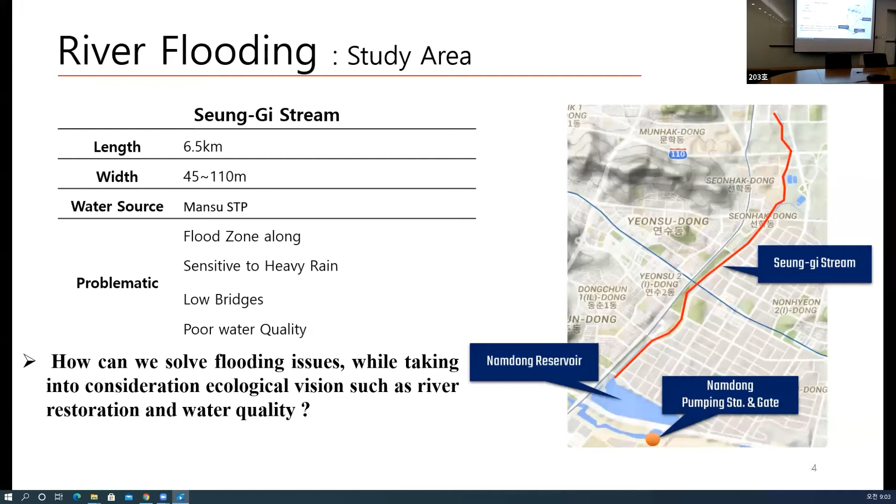HEC-RAS and QGIS were used to model the Seung-gi stream. HEC-RAS is a program that models the hydraulics of water flows from natural rivers and other channels. After simulating by setting conditions into HEC-RAS, we predicted the flow location and used QGIS to build a DEM and convert a cross-section to 2D to calculate a flow area in HEC-RAS.

When we built the HEC-RAS model, we set a new manning factor by reflecting the real condition in the basic model. After analyzing the results, we suggested improving the levee height with flood prevention measures. We referred to this table when we decided the manning coefficient.

We referred to the Seung-gi stream's field photos when setting the manning coefficient. The water from upstream to Bangjuk Bridge is clear. The waterway is straight and the riverbed has vegetation, so the manning factor is set to 0.045. The Bangjuk Bridge to YeonSu Bridge section has gravel and stone, so it is set to 0.05. Finally, from YeonSu Bridge to the downstream, we used a generic factor of 0.03.

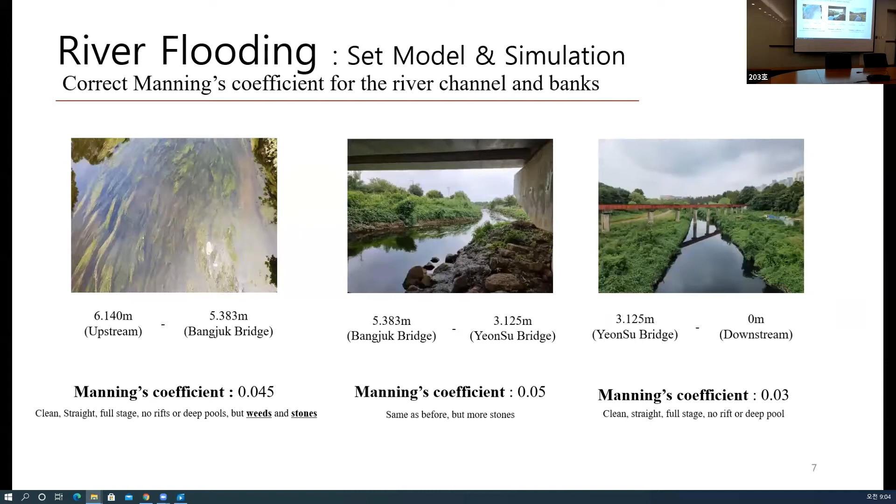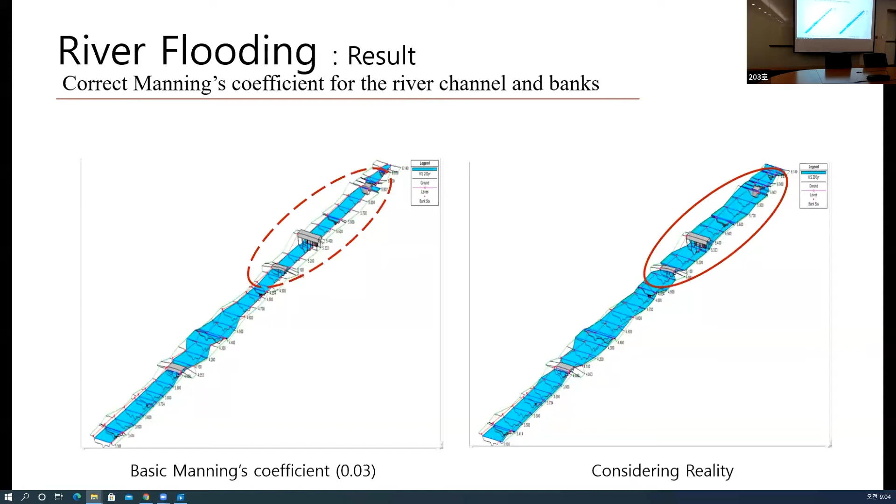As a result, we can see there was more flooding when we considered the manning factor according to reality instead of the manning factor according to the basic model. So this part of calibration is very important. You should always keep in mind that reality varies significantly from models.

This figure shows the frequency of 100 years from the longitudinal cut. The pink and purple lines represent levees, which can be seen to be flooded between 3.3 and 6.1 kilometers downstream after the 100-year return period.

In particular, the left levee is lower than the right levee, so flooding is more expected to occur on the left. On the map, the left side of the river is a company complex, which is expected to cause a lot of damage when flooding occurs. So this area needs flood prevention.

We improved the levee height of the flooding area. Today, the frequency of torrential rain is increasing, so the criteria of river design is increasing also. Therefore, the Seung-gi stream or local stream was originally designed for a 100-year plan, but the levee was raised with reference to the frequency of 200 years.

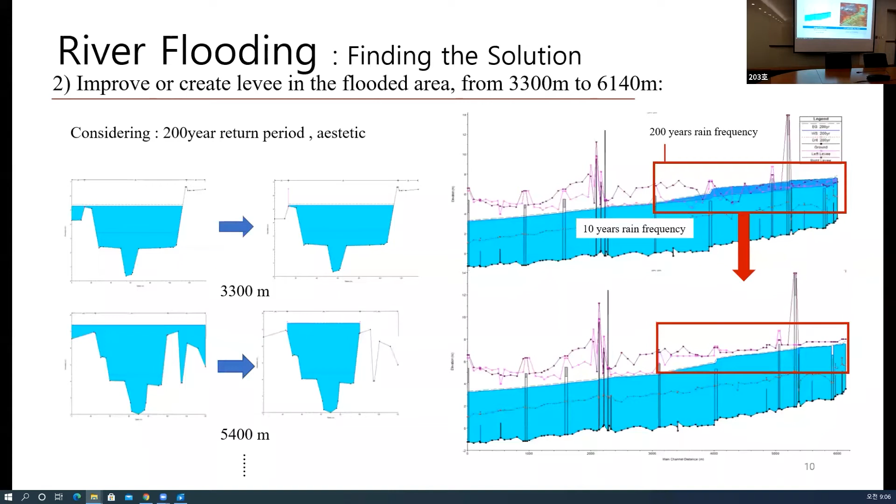With the longitudinal cut, it is easy to see the changes in water level and the height of the levee immediately, but it is difficult to know the extent of flooding. Therefore, we tried to express the flood with RAS Mapper after building the DEM.

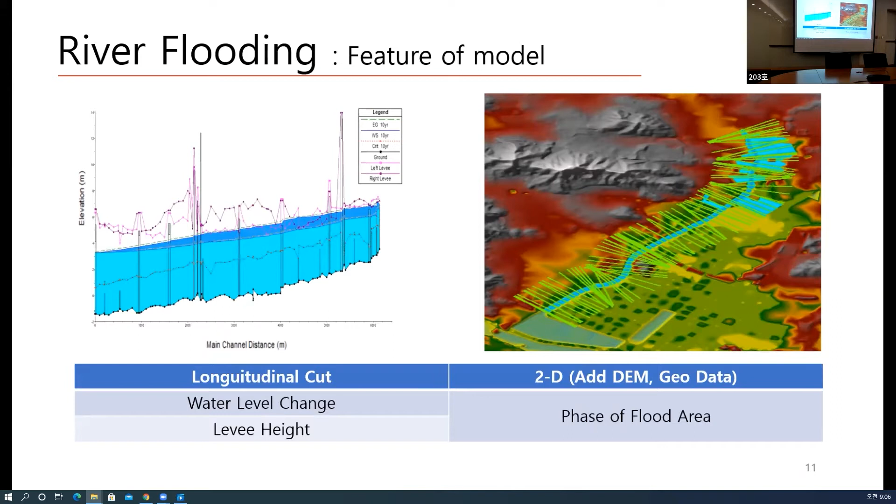This is the result we got. We can clearly see that the industrial complex area and the rural district will be safe according to the improvement of the levee that we made.

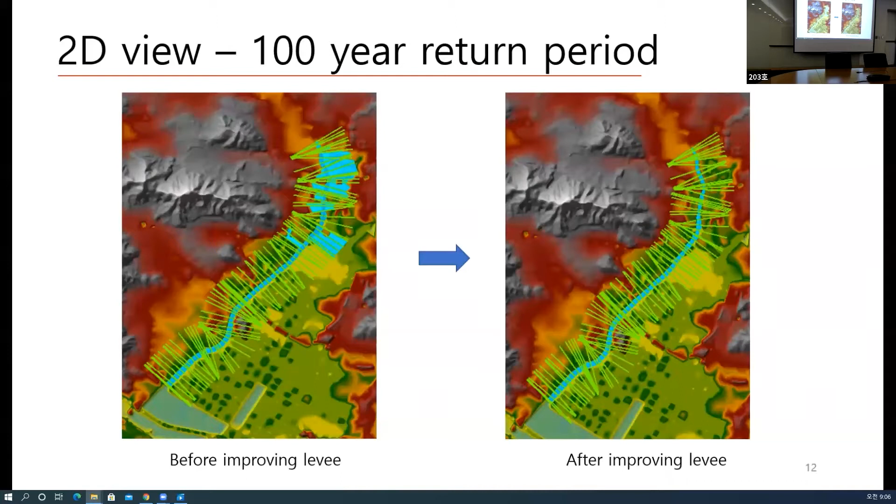According to the Seung-gi Stream report, we found a significant lack of dissolved oxygen. This report confirms the existence of stagnant zones in the middle stream, which leads to an increase of pollution as it runs downstream, and the predisposition of dissolved oxygen to fall.

So to improve water quality, we can apply a variety of methods, zeolite bed, artificial wetlands, or even purifying plants. However, these methods are determined by engineers in consideration of the situation and conditions in the applied area. In this study area, in the Seung-gi stream, we can expect positive effects by increasing the efficiency of self-purification, only if sufficient dissolved oxygen is maintained.

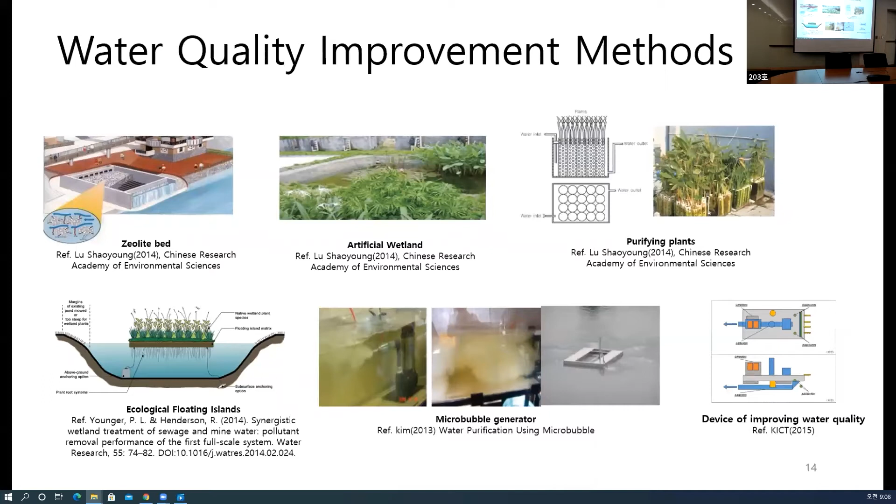Therefore, microbubble technology will be applied. I would have loved to show you a microbubble simulation and how this technology works, but sadly, with this recorded PowerPoint, that's not possible.

So I'll show the link. I recommend you take a screenshot, and you could search by yourself if you're curious. And if you don't have time, I will show the link again at the end of the presentation.

So then we were thinking about where to install the microbubble generator. We think about stagnant water, which will have the worst water quality in the riverbed.

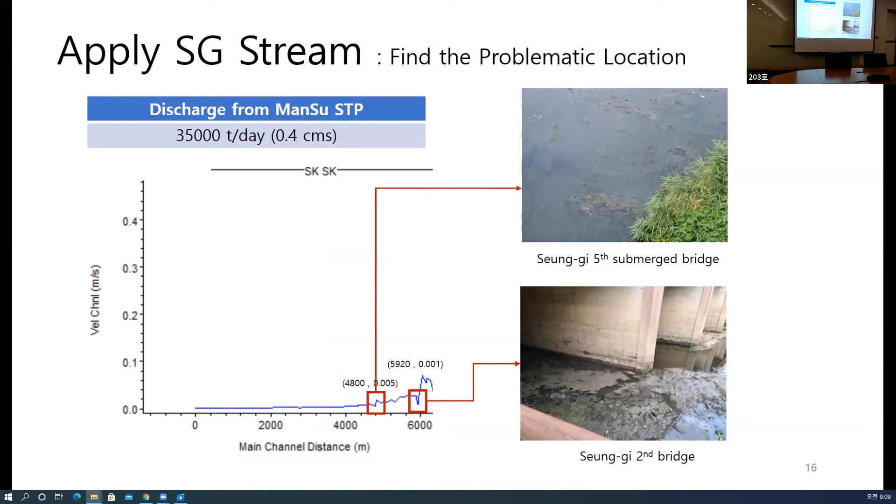Onga River in Japan is a good representative case of water quality improvement using a microbubble generator. Here is the location of Onga River, and a microbubble generator was installed in 2004. Figure 3 represents the dissolved oxygen distribution according to whether it's installed or not in the river.

Following the report, they now use the water as an intake facility. So if we can install a microbubble generator in Seung-gi, we could expect improving water quality like this. This is the end of the river flowing case, and now the next part will be the inland one.

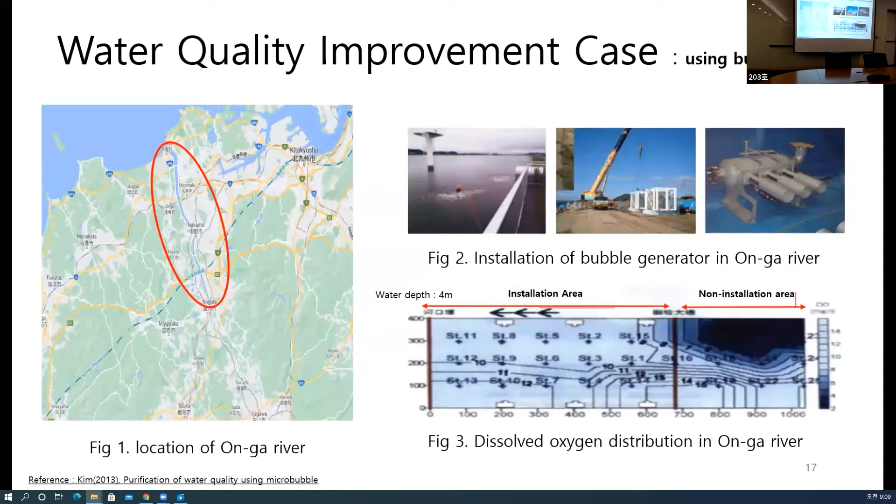On July 2017, a significant rainfall event occurred in Guwol-dong, Incheon. Rainfall gauges in the affected area recorded between 90 millimeters and 110 millimeters of rainfall over a 6-hour time period, and more than 100 area residents reported flooding.

With the EPA SWMM software, we were able to recreate this event. You can identify the flooded area with the red zone. Then, why did the flooding happen in that place in Guwol district? This is a question we asked ourselves.

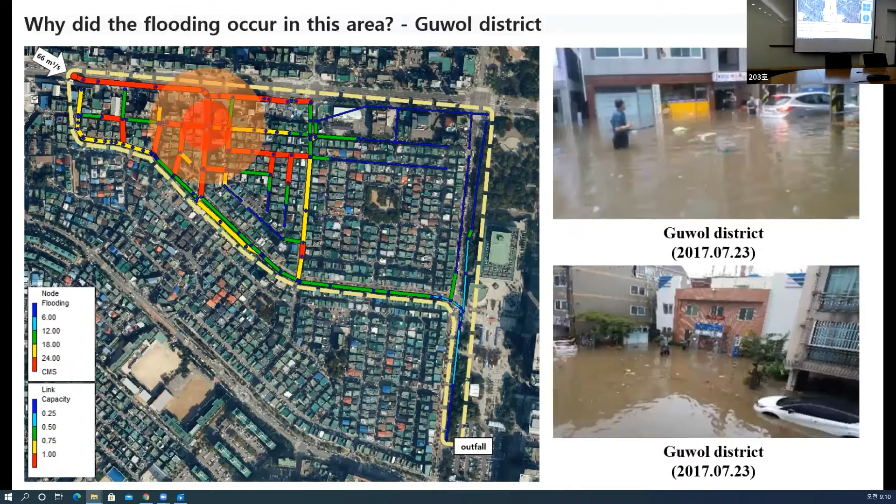We analyzed it for two main reasons. The first is that the cross-sectional area of the channel is small compared to the order of the main channel.

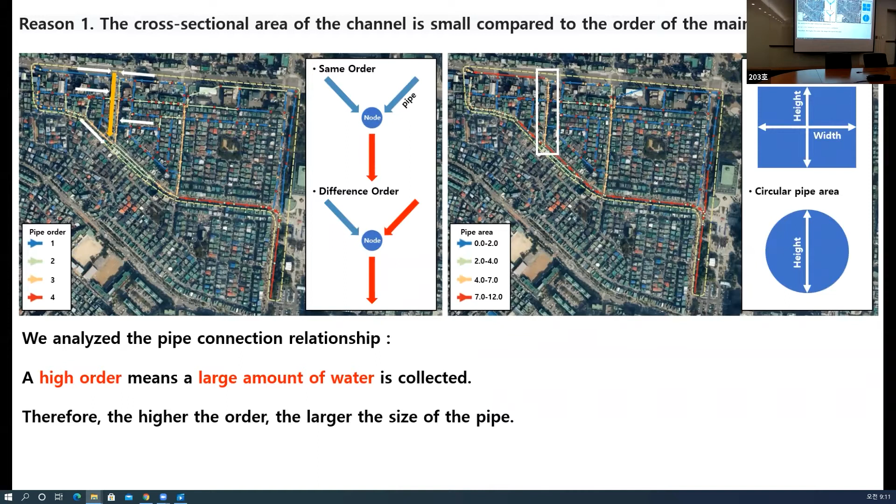In order to identify the cause of inundation in the target area, we analyzed the pipe connection relationship. A high order means a large amount of water is collected. Therefore, the higher the order is, the larger the size of the pipe has been. However, the pipes in the white box on the right figure are relatively small to handle the large amount of water transported upstream.

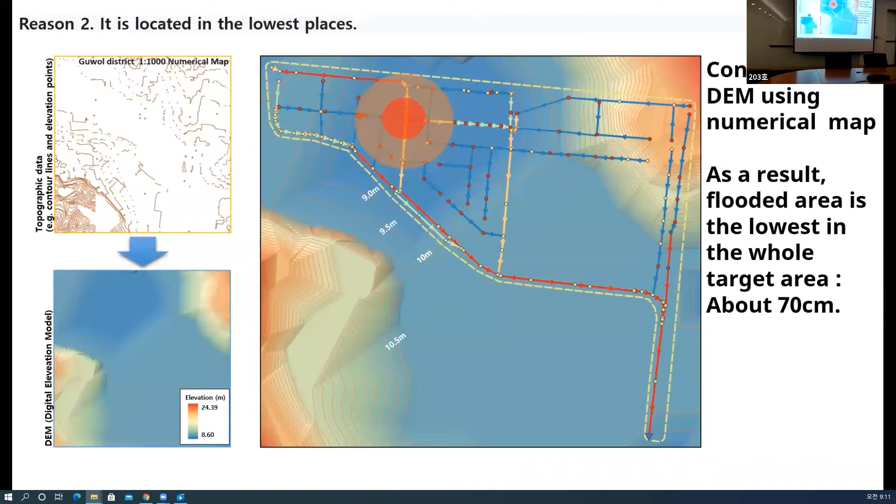Then how can we prevent the flooding in the Guwol district? More than 71% of the total area cannot be developed, which means difficulties in expanding new pipe networks.

So we found two sites where we can build storage tanks. Those sites are parks located in the city where it is easy to install an underground storage tank. So we applied a 65,000 ton storage tank.

It was confirmed that no flooding occurred in the main flooding node. Of course, this is the capacity considering only storage. When draining facilities such as pumps and flood networks are applied at the same time, the storage capacity will be significantly reduced. So it's not really 65,000 tons, it will be something lower.

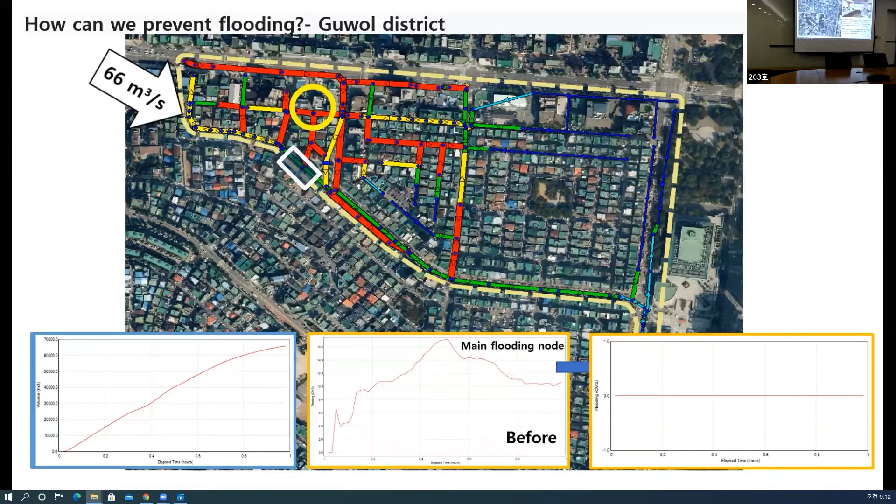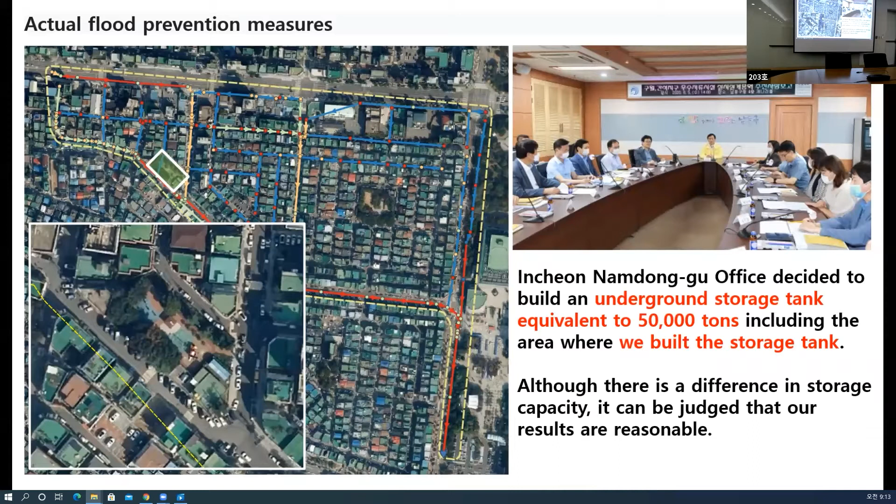There are practical policies that can add credibility to our results. In fact, Namdong-gu in Incheon decided to build an underground storage tank equivalent to 50,000 tons, including the area where we build the reservoir. There are differences in storage capacity, but our results can be judged to be reasonable.

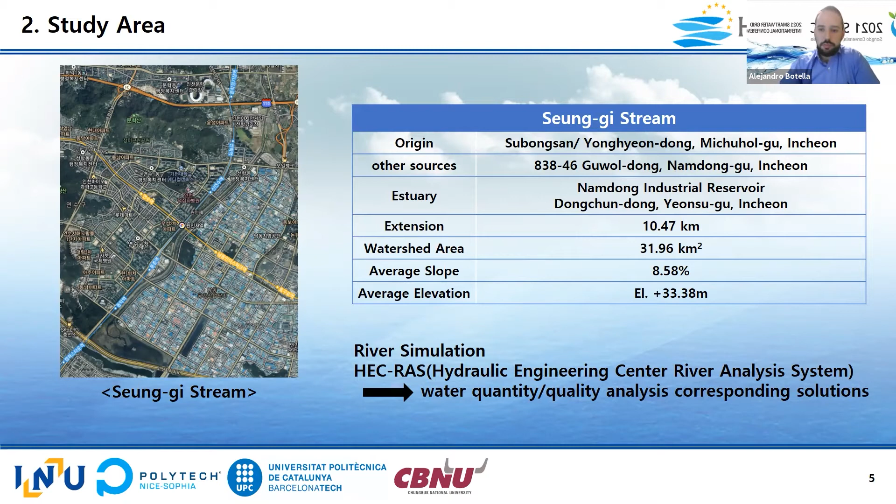Guwol-dong is located in Namdong-gu, Incheon. The study area is 0.42 square kilometers, and the area has been flooded 3 times, in 2010, 2011, and 2017.

The purpose of the simulation was to find the location of flooding areas with 100-year return period discharge and prevent flood by modifying the cross section.

This is our input data for the HEC-RAS model, which we simulated using steady flow conditions. This is the result of the HEC-RAS simulation model with 100-year return period discharge.

After we ran the simulation, we noticed that 9 cross sections were flooded. Flooding was observed to occur in the upper-mid-stream part.

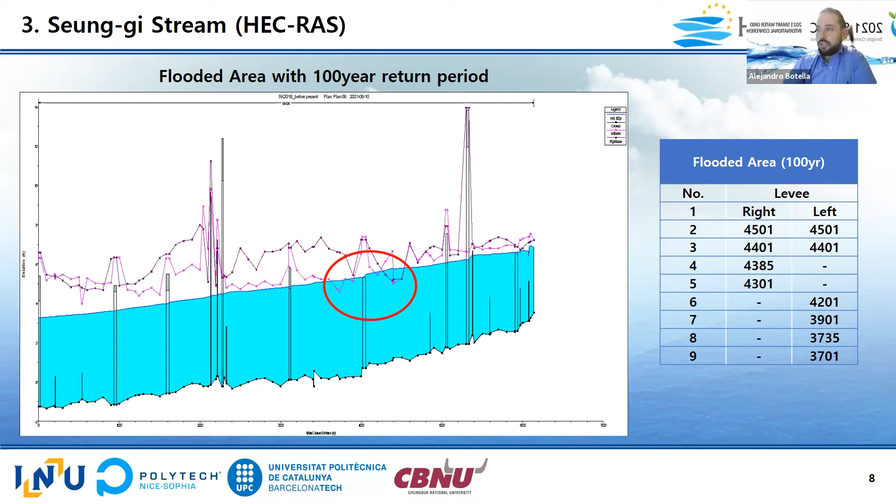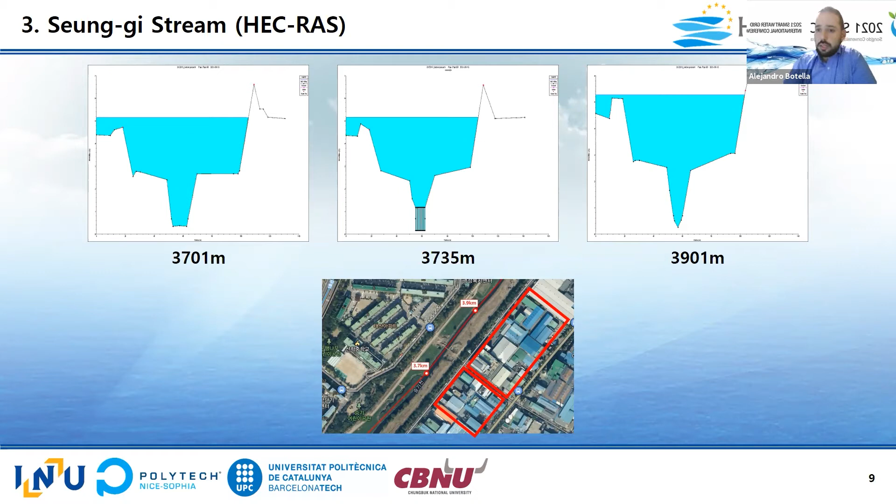This place is the middle part of Seung-gi stream. As you can see, with the 100-year return period discharge, this industrial complex area can suffer from flood, and this is because the left levee is not high enough in this section.

This place is the upper part of Seung-gi stream. Same as the middle part, these places can also suffer from flood. On the left side of the stream there is a parking lot, and if this area is flooded, we can expect a lot of damage.

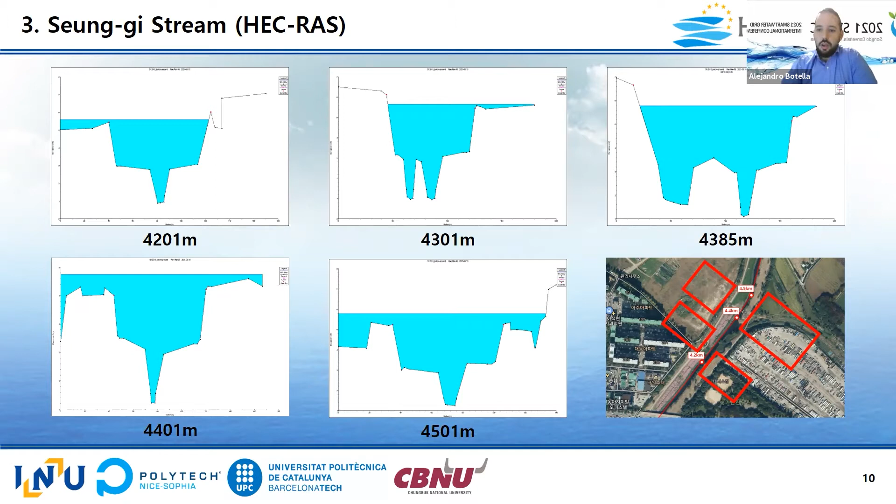Considering sea level rise, we simulated downstream boundary conditions with 4.6 meters. Most of the left levee was flooded, so we advise reinforcing it to prevent flooding in the future.

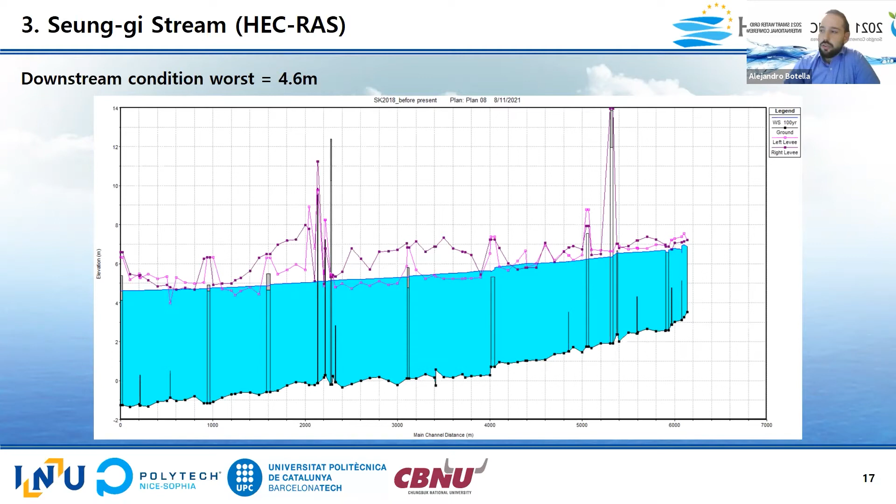We did the previous simulation with a Manning number of 0.03, but considering the actual morphology of Seung-gi stream, this number should be around 0.04. It increases the water level during the flood, but constructing higher levees should tackle the issue.

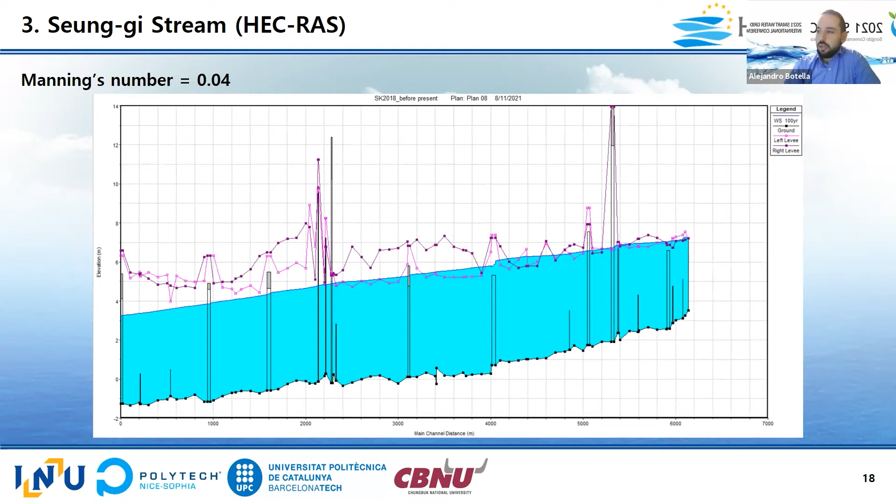We conducted a SWMM model for flooding simulation. Our simulation purposes were to find the flooding area with a 50-year return period and suggest a solution to prevent the flood, and check the applicability of our solution.

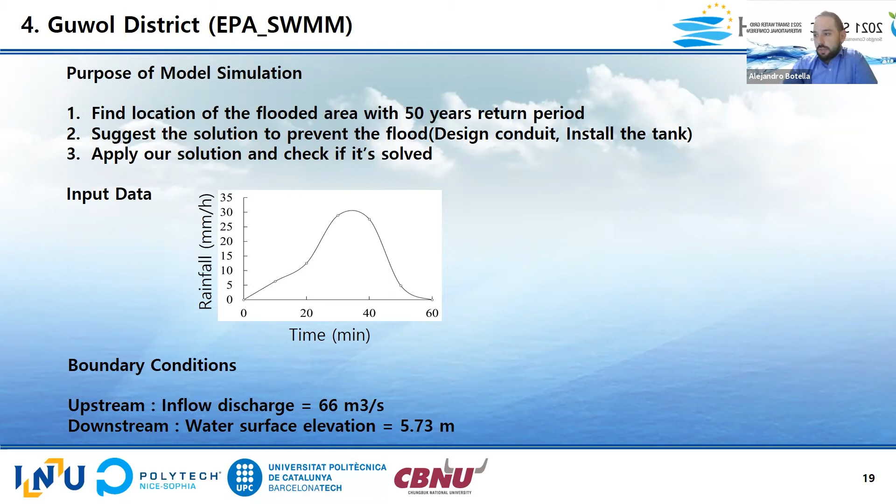We used 50-year return period rainfall as input data, and set the boundary conditions as follows: an inflow discharge of 66 cubic meters per second at the upstream part, and at downstream, a water surface elevation of 5.73 meters.

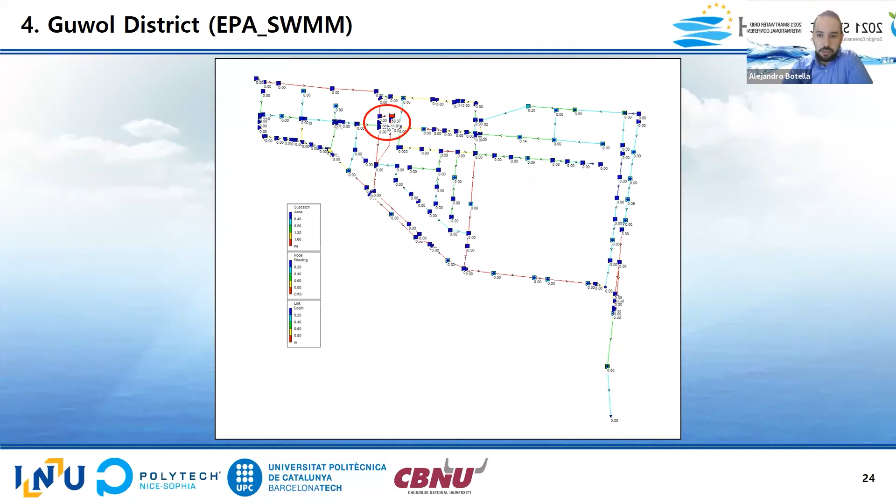So we installed a tank and a pump in area number 2. It could reduce the flood in this area, and we could also decrease the flood discharge of area number 4 by increasing the size of the pipe.

About the water quality problems in the study area, we identified 2 main issues. For analyzing them, we had water quality data from Yeon-su Bridge and Dong-mak Bridge. On the right table, we can observe the Korean standards for water quality.

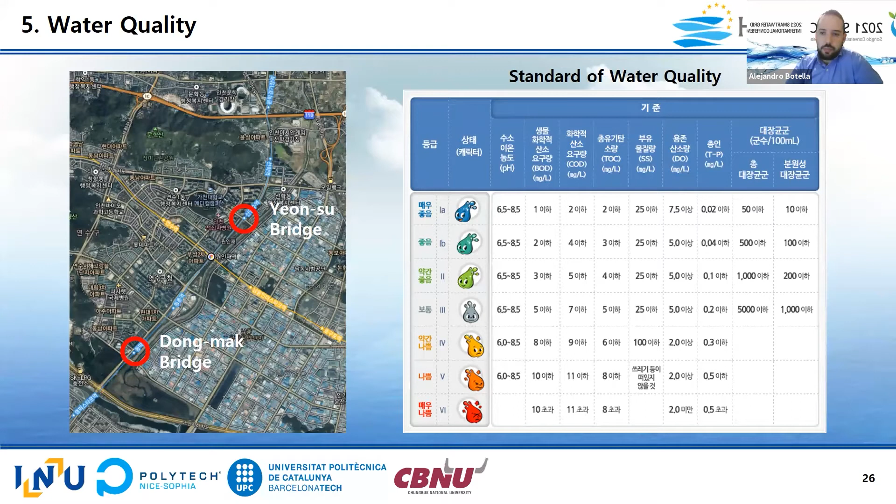In the upstream part, close to Yeon-su Bridge, the water quality data indicated a high concentration of BOD and low concentration of DO. Both of them are indicators of the level of pollution of the stream. On the other side, we can also observe a high concentration of TP, which can result in eutrophication problems.

For this area, our suggestion is to increase the intensity of the water treatment plants to improve the pollution parameters, or even create new ones if needed, and also implement bioretention systems along the stream. Basically, these are systems of plants and trees capable of absorbing nutrients such as phosphorus and nitrogen that are the main reason for eutrophication.

For the downstream part, close to Dong-mak Bridge, some of these parameters were even worse, likely due to the presence of an industrial area that can cause illegal discharge into the stream. So for this area, we suggest analyzing the discharge from this area and its sewer network, improving it if needed, and implementing penalties for companies that don't respect environmental regulations.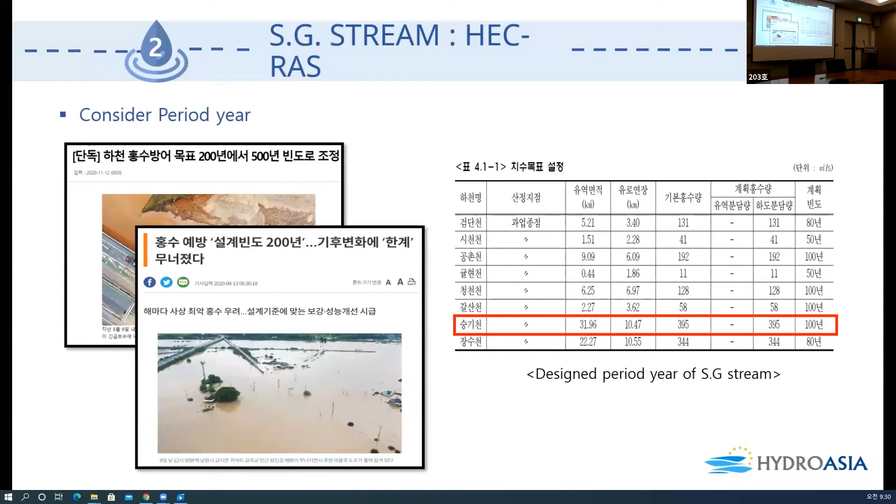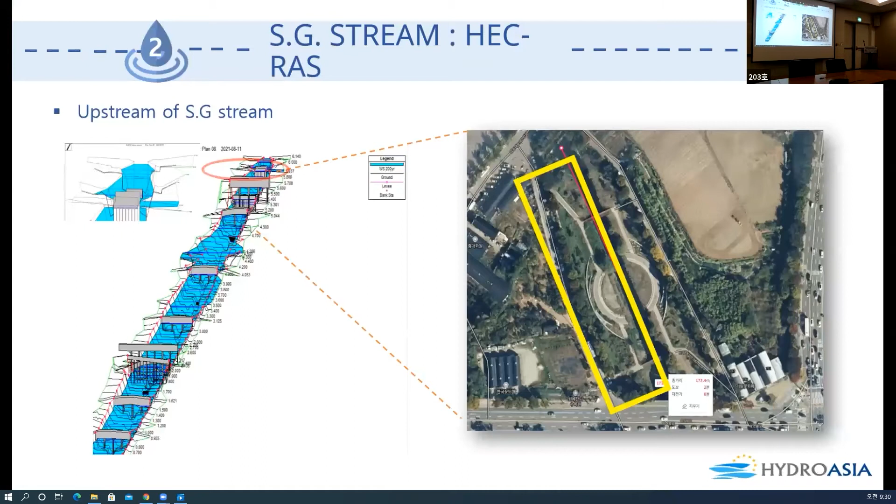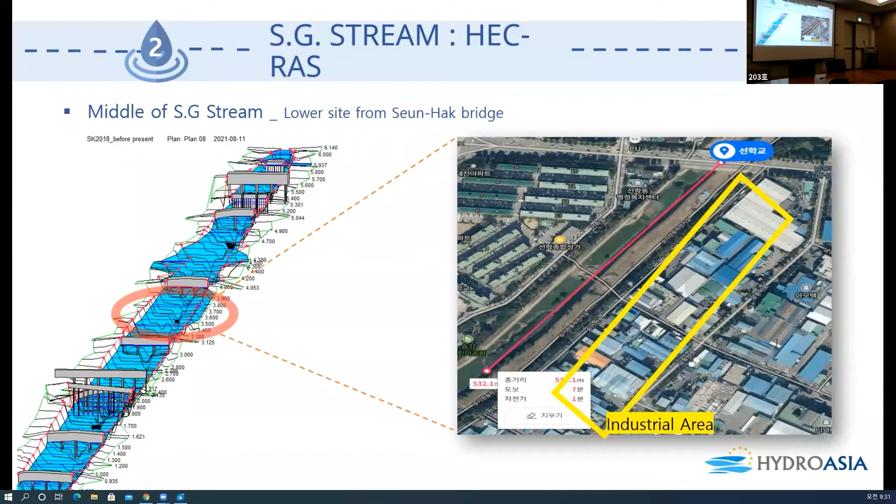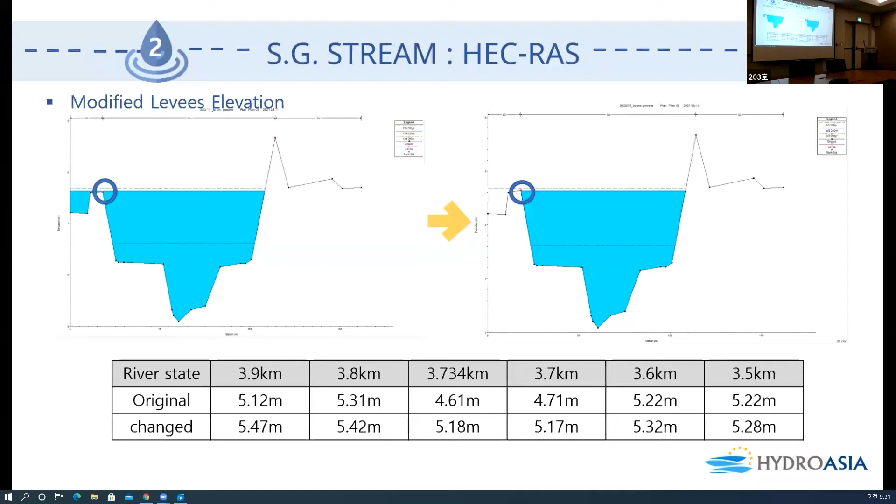Here in the middle of the stream, there's a flooding issue on the west side. We considered the near upstream side because we wanted to widen the bank area more if we could, but the left side is the industrial area, meaning it's too hard to make the bank area wider. So we just modified the levee elevation by about 6 to 57 centimeters on that part of the stream.

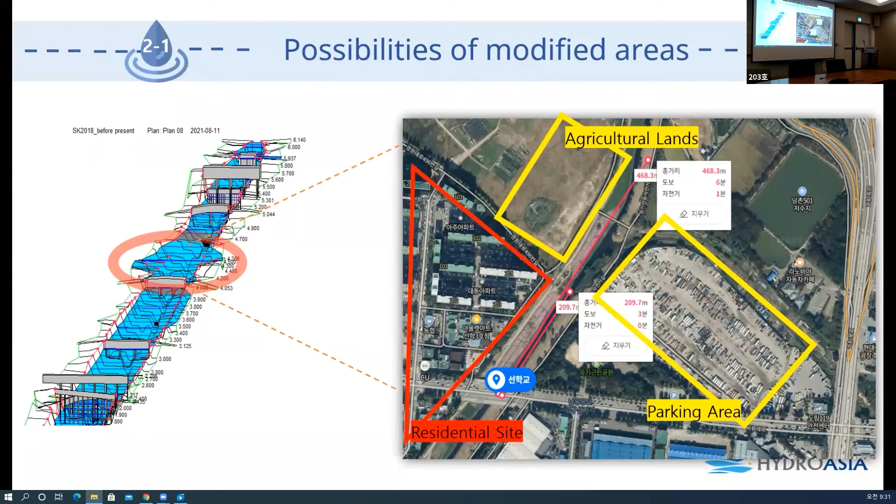As the second method for preventing the flooding issue, we modify the riverbed and apply vegetation. Near the Seun-Hak bridge there's a flooding issue, so we thought to modify the areas. The flooding area's land use includes parking, vegetation, and agriculture. But residential sites are really hard to modify, so we just modified the agricultural land and parking area. This picture shows how we modified the land: we change the slope and height of the riverbed, and also apply vegetation on the riverbed.

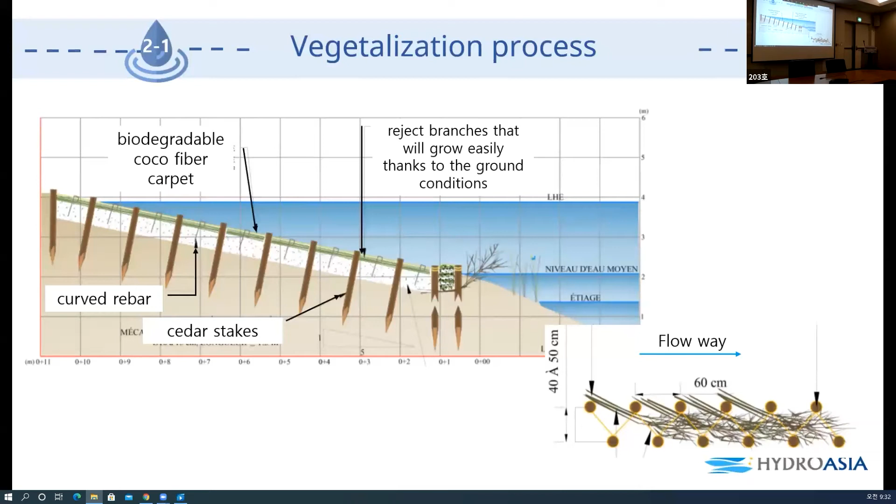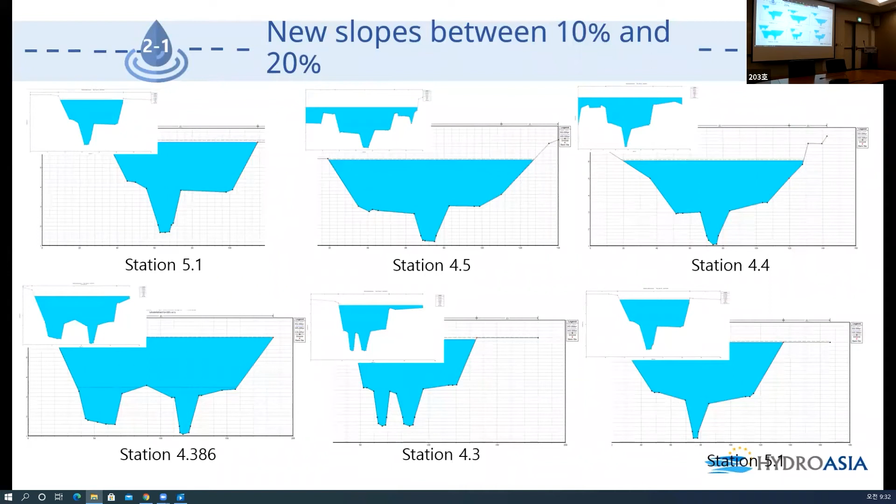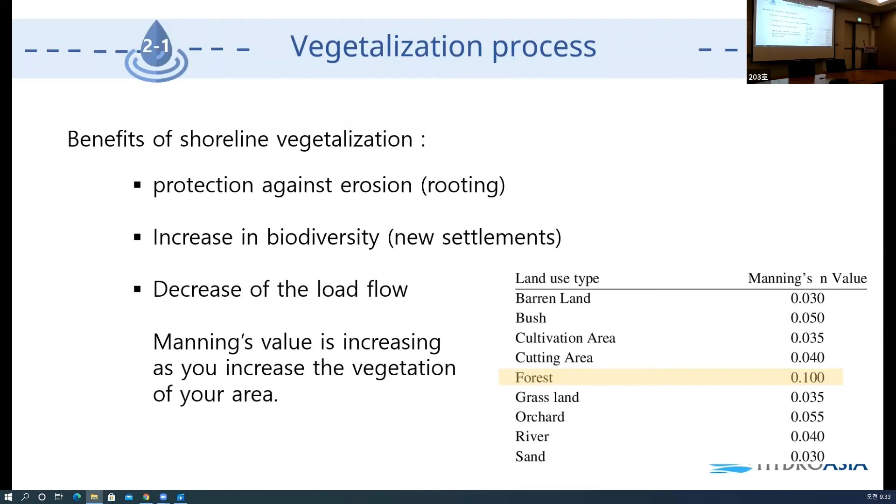When we apply the vegetation process, it has several benefits. First, we can protect against erosion, and it can increase biodiversity through new settlements. Also, we can decrease the load flow, and Manning's values increase as you increase the vegetation of your area.

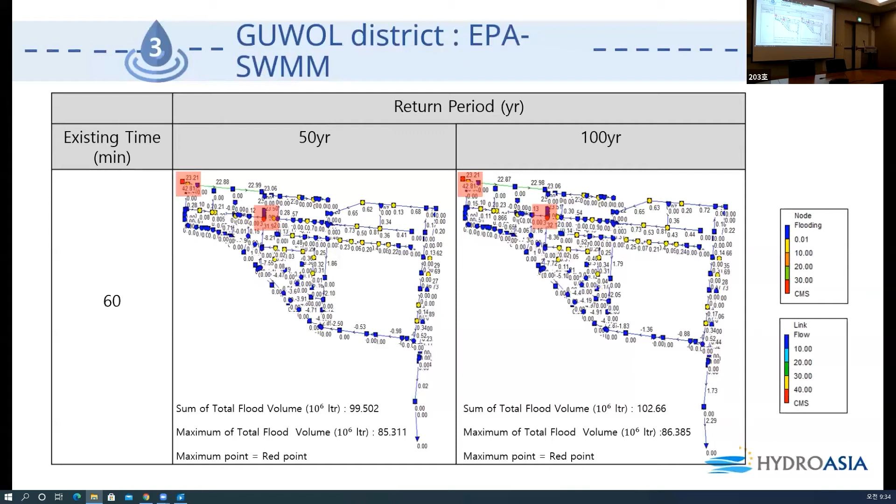Now we modify the sewer system to mitigate flooding. First, we change the pipe size. Second and third, we use low impact development, an approach to environmentally friendly land use development. Fourth, we insert a reservoir tank and a pump.

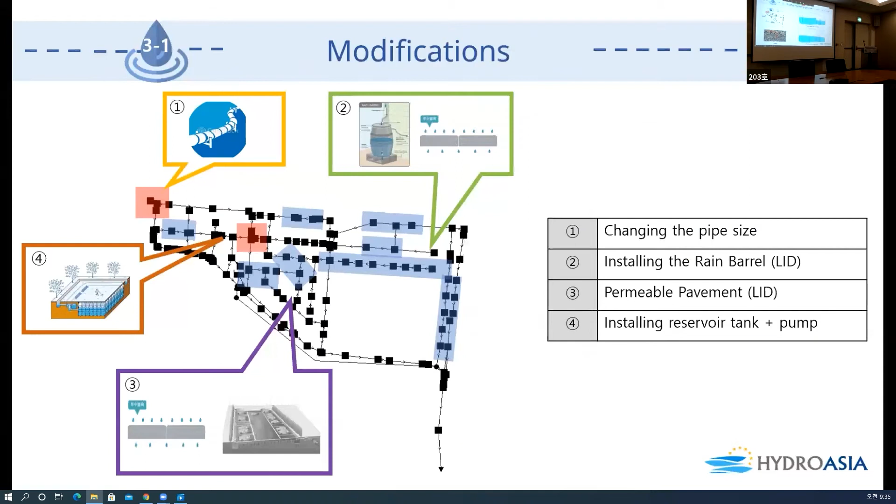The first red box point had very high flooding, so we changed the pipe size, and then we could prevent the flooding at the inlet area.

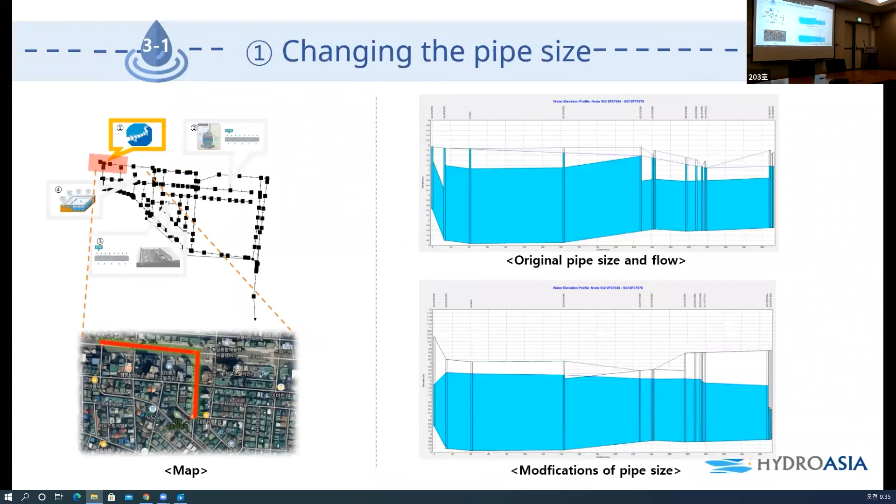Second, we use rain barrels. It's like a rainwater tank. A rainwater tank is a water tank used to collect and store rainwater from rainfall.

Third, we use permeable pavement. By using that pavement, we can reduce runoff volume by trapping and slowly releasing precipitation into the ground.

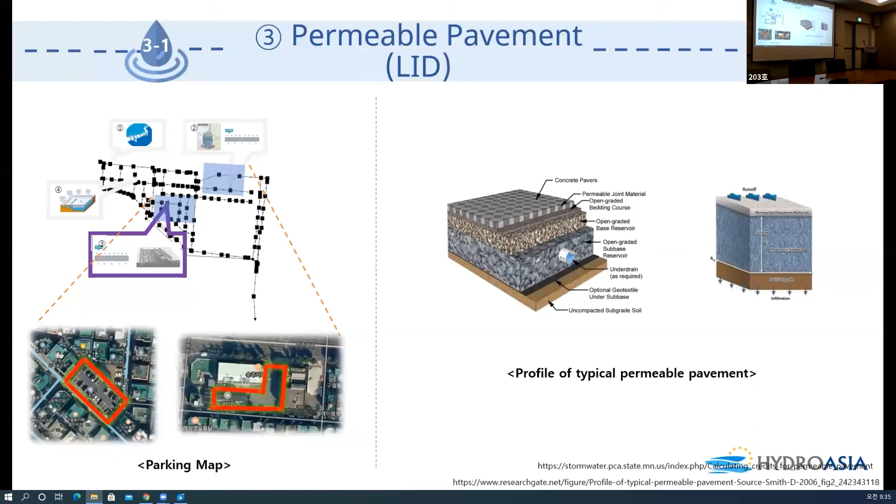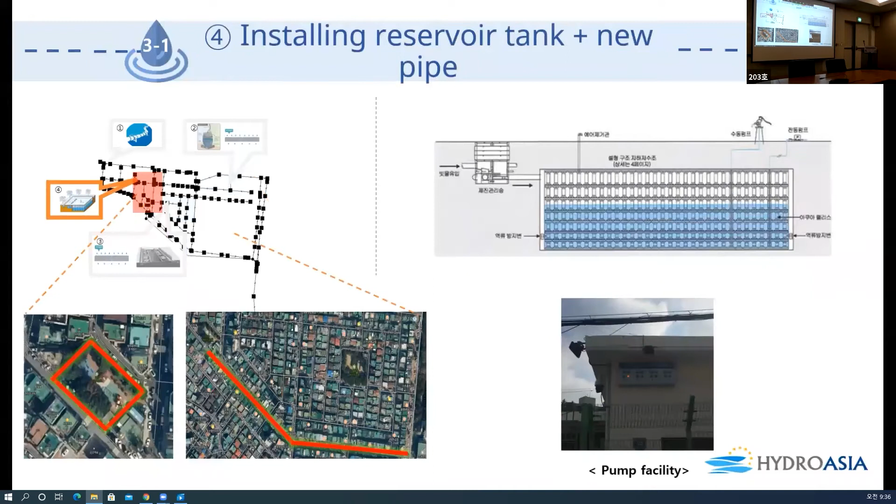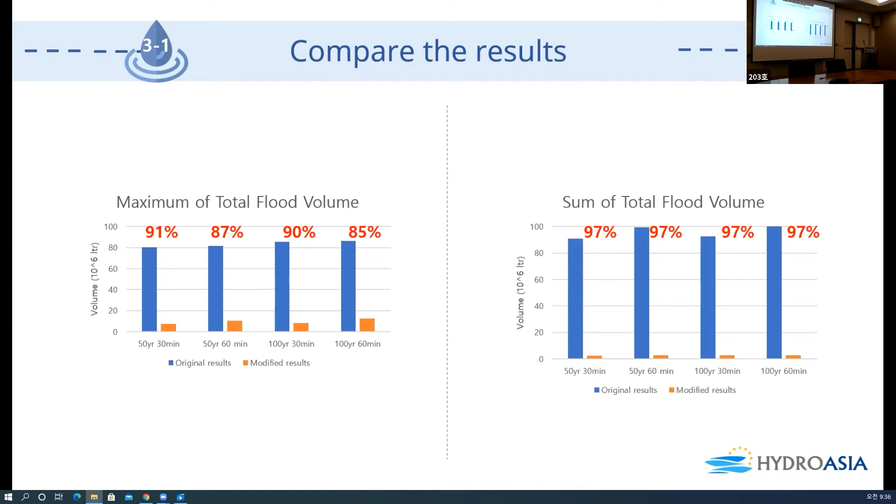By using this method, we were able to reduce the maximum total flood volume by an average of 88%, and the sum of the total flood volume by 97%.

Thank you for listening.

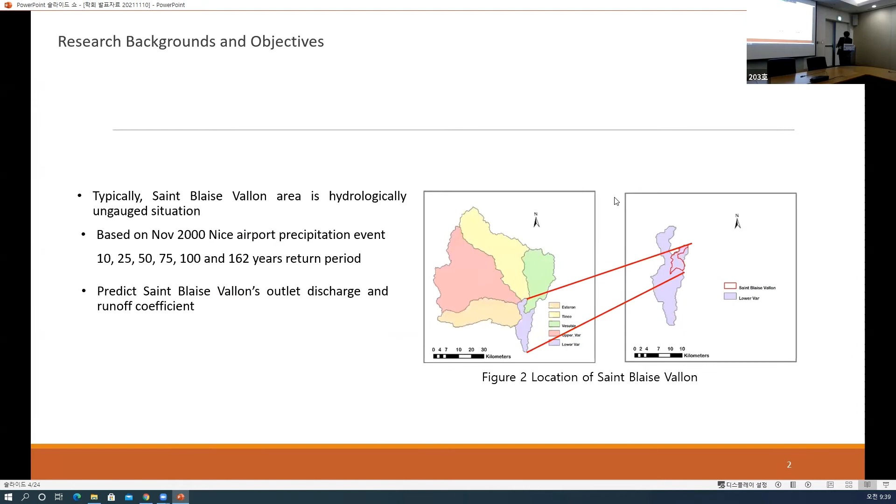This figure shows the location of our catchment. It is located in the southeast part of France, and our catchment is divided into 5 big sub-catchments: the Upper Var, Esteron, Vesubie, and Lower Var. The catchment area is about 2,800 square kilometers, and the longest flow path is 114 kilometers.

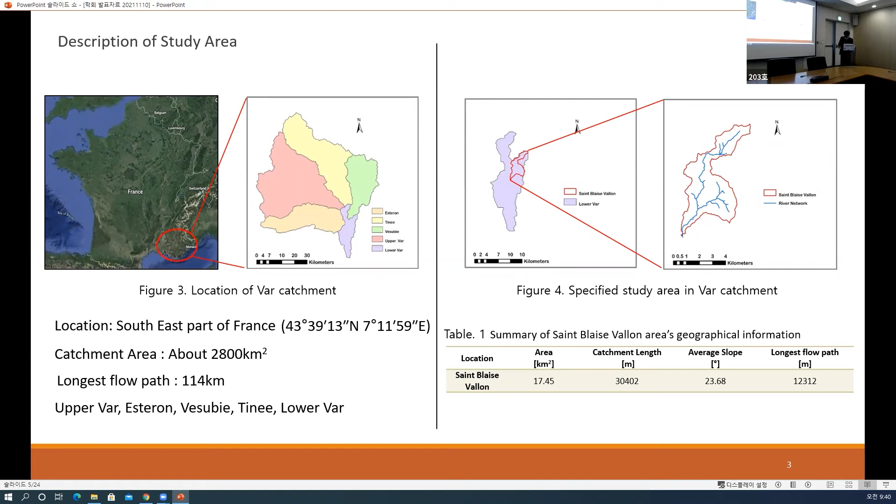There are 3 rainfall stations near the St. Blaise Valley area. Figure 5 shows the location of rainfall stations for Levens and Carros.

Collection of precipitation data began from 2020, and this is the reason why we used this airport precipitation for estimating discharge and runoff coefficient, because this airport began collecting data from 1891. Table 2 shows monthly average precipitation at each rainfall station.

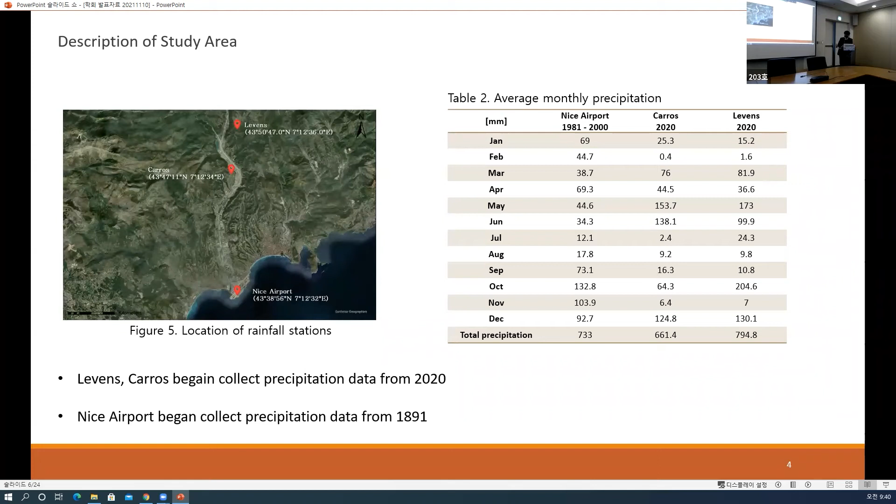This is the steps of the study. Calculating the runoff in mountain areas is one of the most complex hydrological processes because we have to consider 4 main controlling factors: the first is digital elevation model, second is climate, third is land use, fourth is soil characteristics.

Different combinations of these 4 factors determine the complex runoff in mountain areas. Most of the input data for the model, such as model domain, topography, land use, and soil type, should be prepared in ArcGIS. This figure shows the process of ArcGIS.

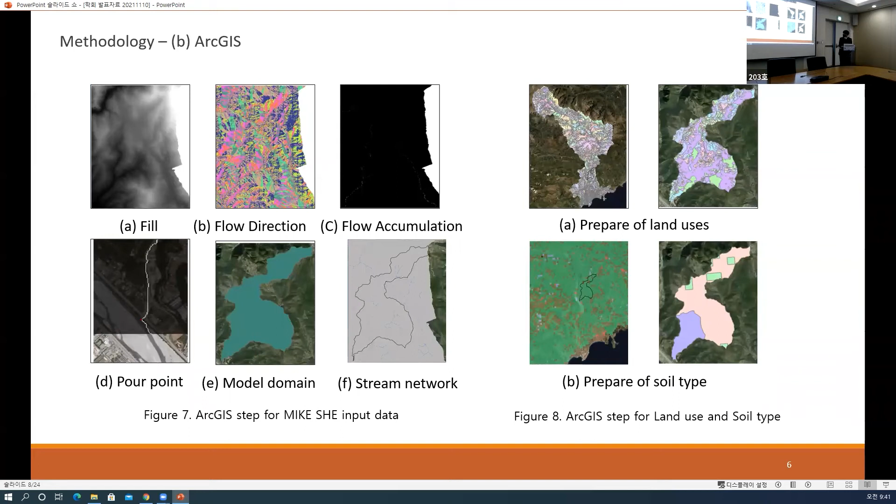MIKE SHE and MIKE 11 were used for hydrological analysis. The Mike model is from Denmark's DHI company, and it is an integrated hydrological model. In this study, we did a coupling process to consider not only surface flow but also channel flow. This model comprises the finite difference and partial differential equations of mass and energy balance.

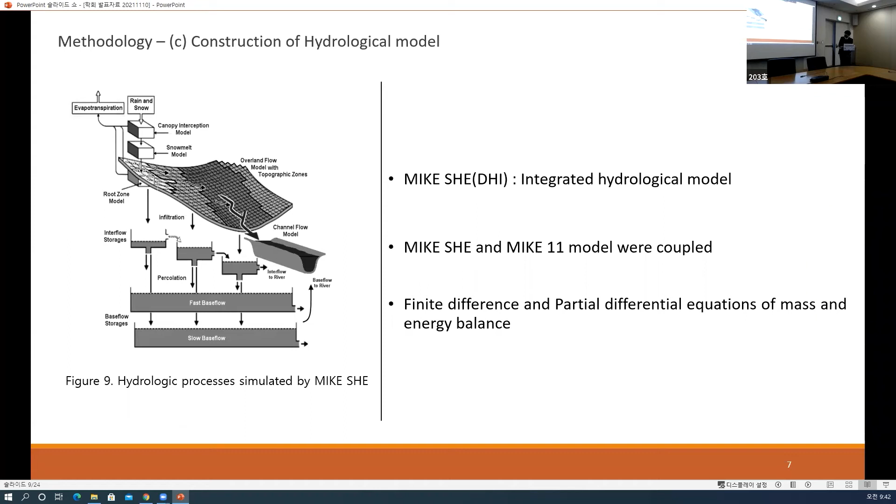As a requirement of MIKE SHE, we need topography and land use. The 5-meter DEM topography data is provided from the city hall, and to reduce calculation time, we converted it to 10-meter resolution from 5-meter. The observed elevation is 85 meters to 1,400 meters.

The land use data is also from the city hall, and the original data was divided into 788 categories, but we reclassified it into 9 land use categories. After reclassifying, the residential area is around 11%, and 89% is forest or agriculture.

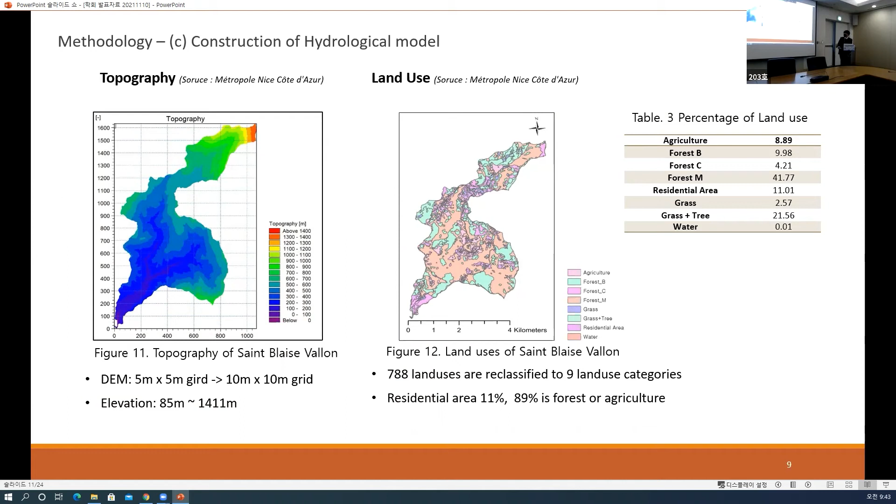The particular values based on land use were adopted from previous research by Qiang Ma, such as leaf area index, rooting depth, and crop coefficients. Data are from the Sophia Antipolis Laboratory.

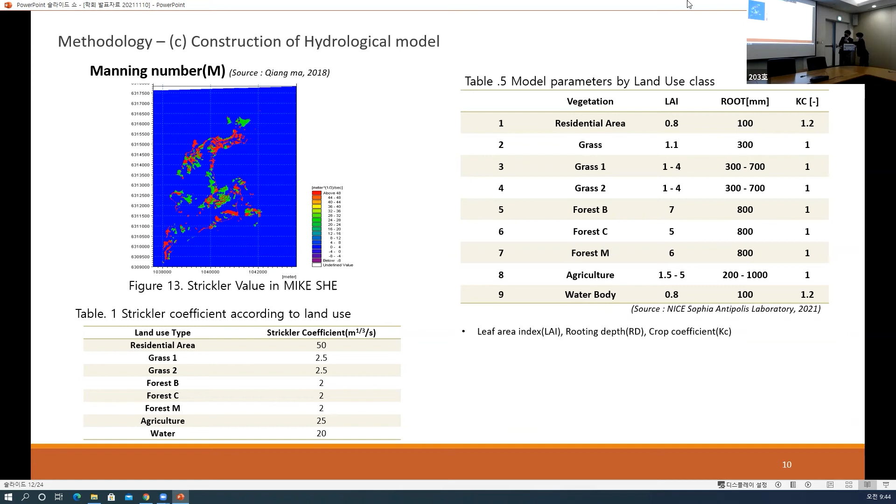Soil type data is from the US Department of Agriculture. The original data consisted of silt, clay loam, and silty clay loam, but through field investigation, we found that the downstream part of St. Blaise Vallon consists of Puding, which is almost the same as sand. So we modified the soil type.

In MIKE SHE, we have to set the hydraulic properties for the individual soil types, so we adopted previous research data from Qiang Ma for the input.

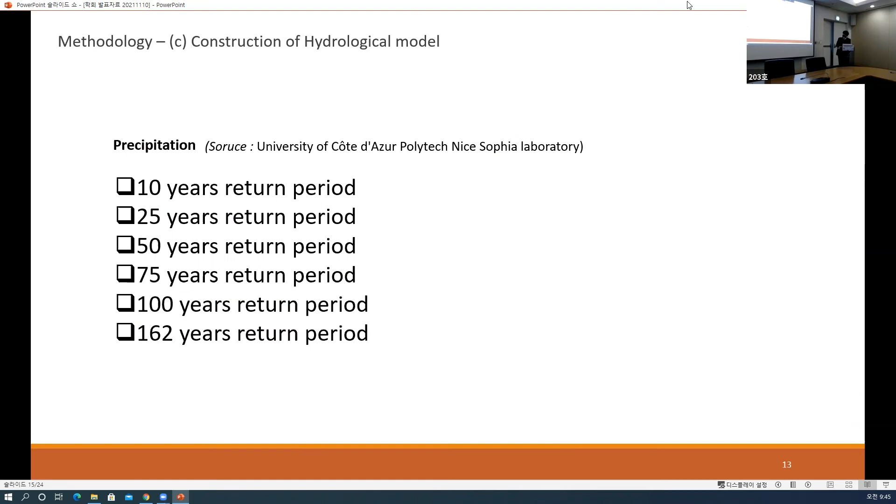The precipitation data were provided from the Sophia Antipolis Laboratory, and simulations were conducted according to 6 different return period precipitation scenarios.

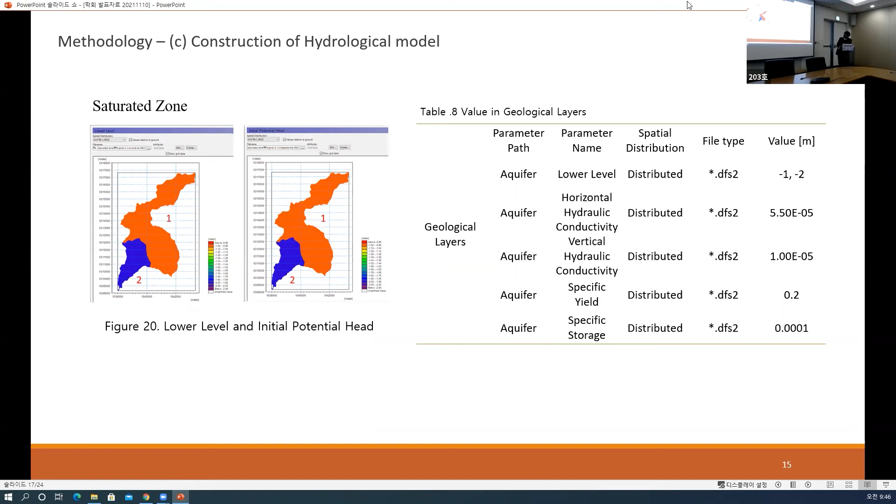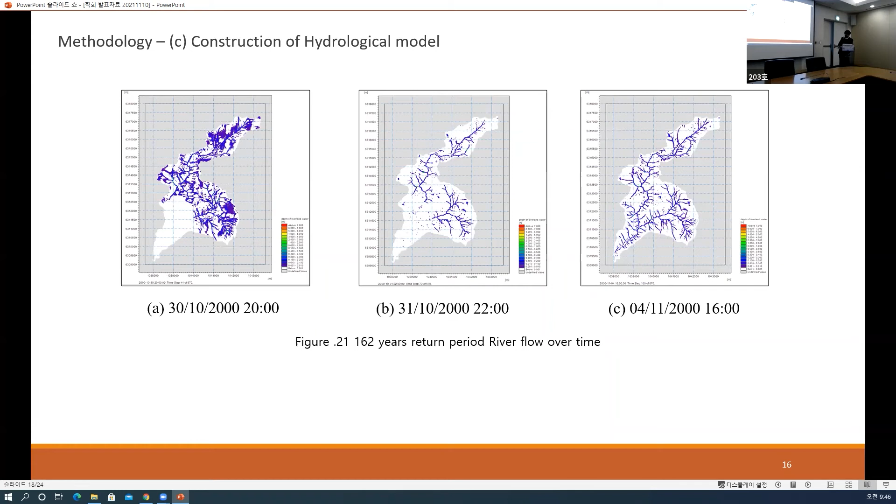This is the result according to the various return period precipitation. If we apply the 162-year return period precipitation in the model in St. Blaise Vallon area, the observed peak discharge will be around 30 cubic meters per second, and the runoff coefficient will be around 0.673.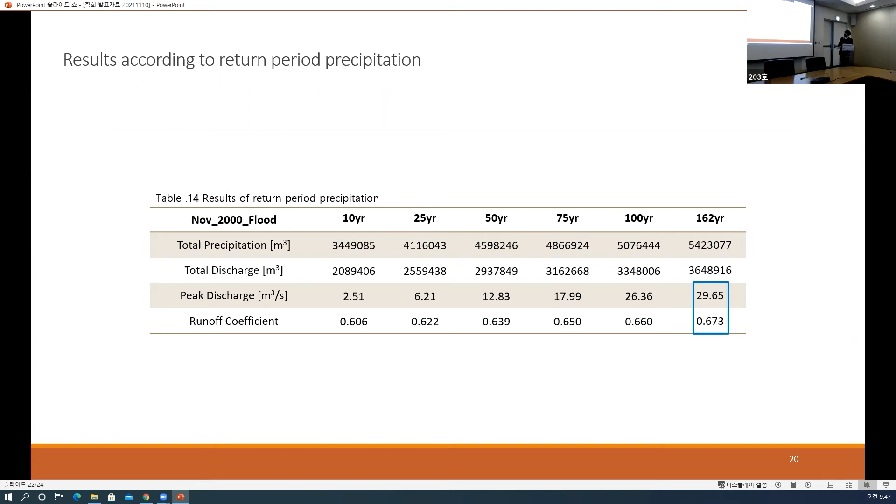So this is the conclusion. First, the model has been set up according to various return period precipitation, DEM, land use, and soil type in St. Blaise Vallon area. If the maximum return period occurs in St. Blaise Vallon, then the hourly peak discharge and runoff coefficient will be around 30 cubic meters per second and 0.673.

With this peak discharge, it is expected that flood mapping for St. Blaise Vallon will be possible in future study. And if necessary, it would be possible to redesign the downstream of St. Blaise Vallon based on results of the outlet peak discharge to prevent upcoming flooding in the future.

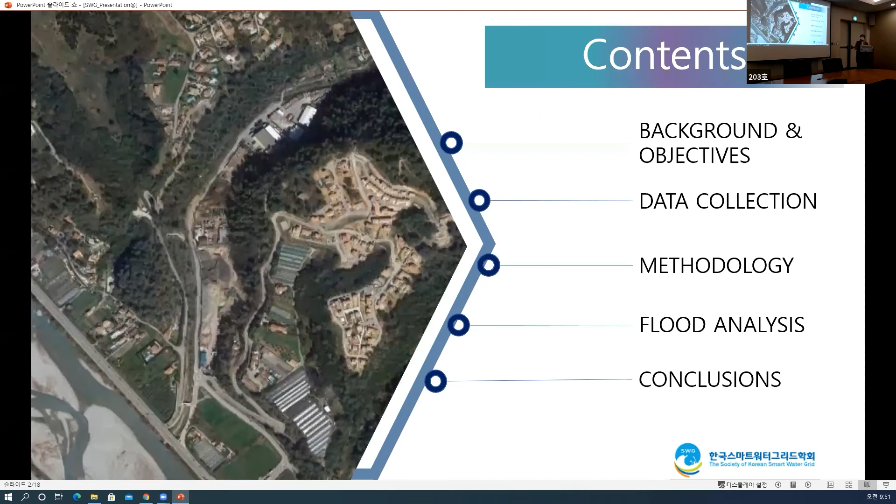This is the contents of this presentation. First, I will explain the background and objectives.

Climate change is occurring around the world because of human activities and urbanization. This has resulted in increasing flash floods and torrential rainfall. The location of flooding has a significant impact on the scale of damage, especially since mountainous areas can suffer big damage because of steep slope and high water velocity. In addition, lots of roads in mountainous areas can get big damage because of sediment transportation.

Most flood prevention and flood resilience mapping are active only in urban areas with high population and sufficient infrastructure, but in mountainous areas flood damage research is insufficient. So this study conducted a hydraulic analysis of a mountainous area.

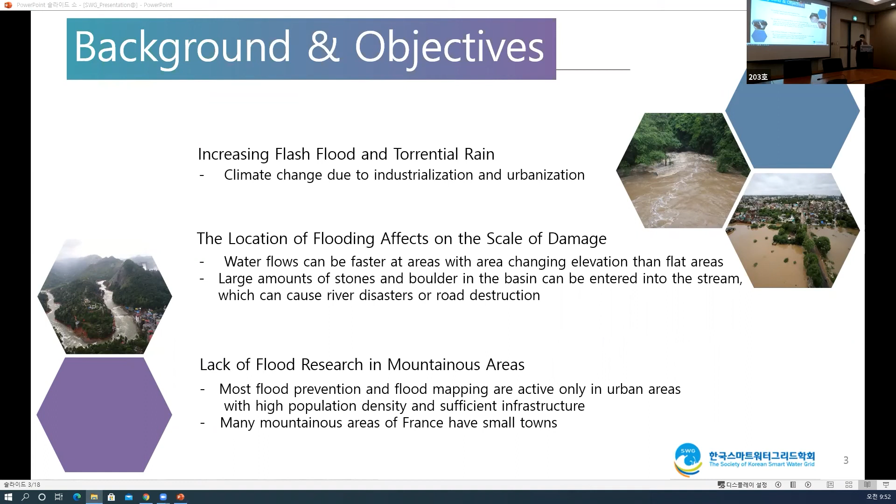Recently in the Var catchment, the frequency of torrential rainfall has increased. Last year, a big flood occurred in the Saint-Martin-Vesubie region. At that time, the precipitation was 500.2 millimeters in 24 hours. Lower-Var has also experienced big flood damage before.

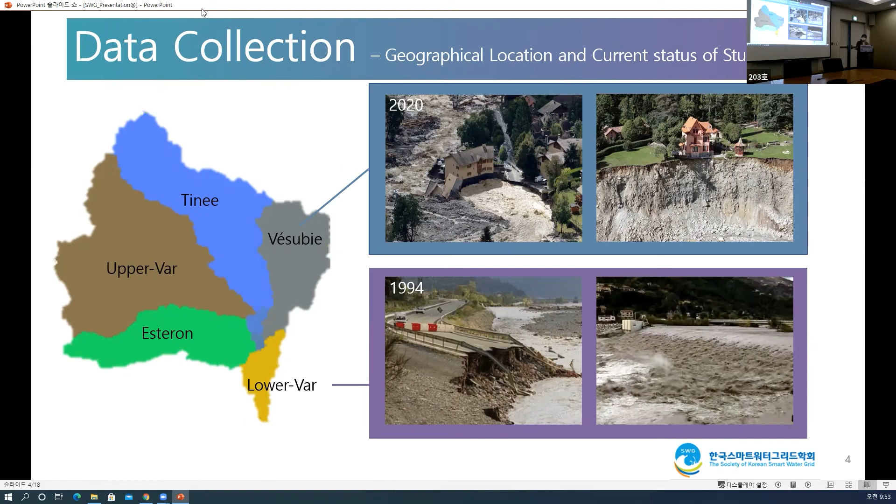The Lower-Var subcatchment is at the bottom of the other 4 subcatchments, so all tributaries of Var River flow to this catchment. The Saint-Blaise Vallon stream is also one of the tributaries in Lower-Var, where a small town is distributed, although it's mountainous. It could cause not only mountain floods like landslides, but also human casualties and economic losses. Therefore, in this study, Saint-Blaise Vallon was determined as the study area to predict flood damage.

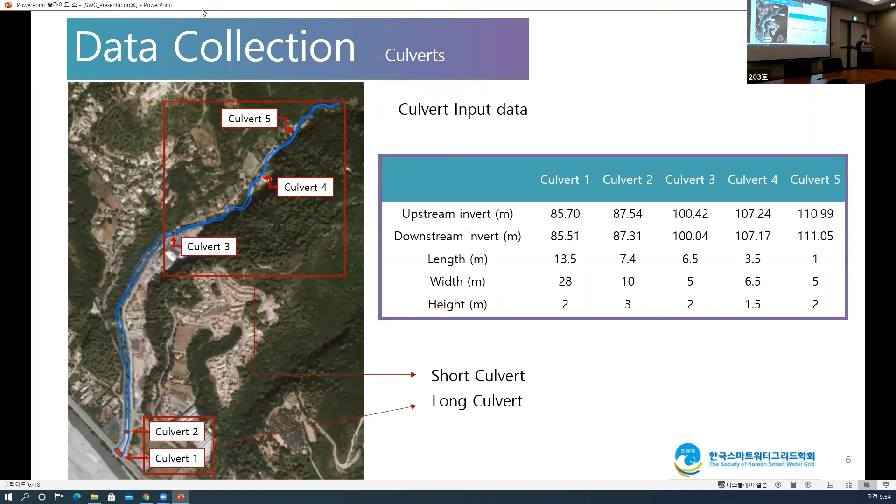There are 5 bridges at the bottom of Saint-Blaise Vallon stream, but bridges are not available in my model, so all bridges are set as culverts. This table shows the specification of the culverts, so these values were set in my model. This page shows the satellite view of culverts and cross-sections.

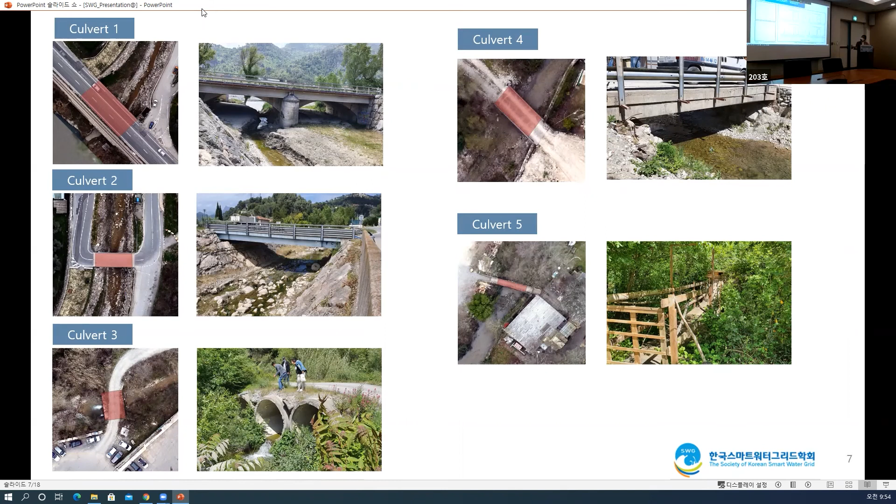Buildings are distributed along the stream and river. This means that if a flood occurs, residential facilities can get big damage.

In this study, discharge of 50, 75, 100, and 162 year return periods were used. The reason why the 162 year return period was used is that it caused really big flood damage to Nice Airport and Lower-Var in 2000.

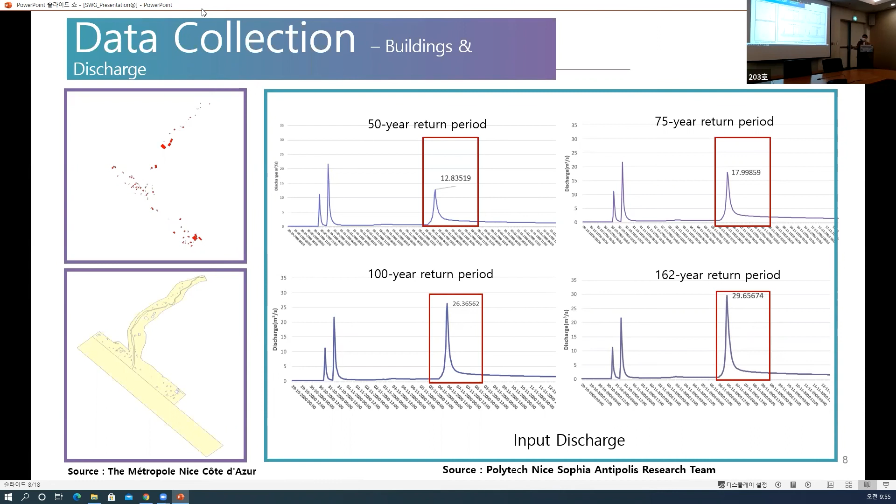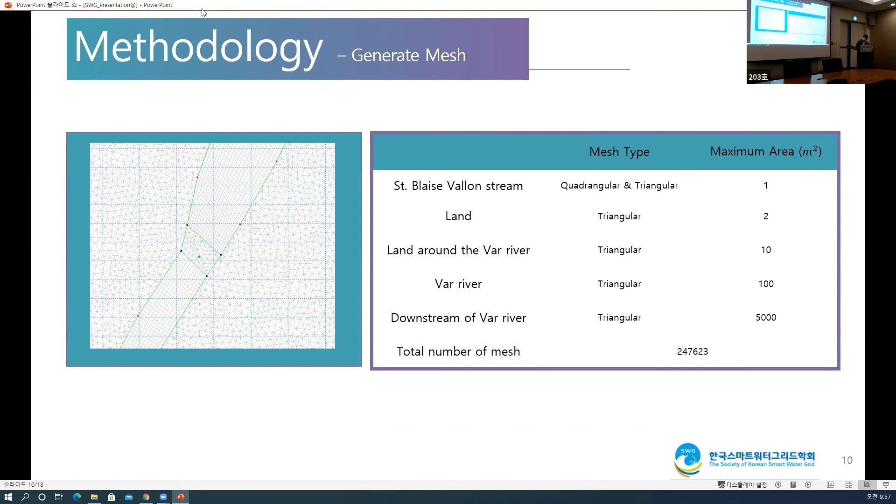The mesh type and maximum area are divided into 5 categories. The mesh types of Saint-Blaise Vallon stream are quadrangular and triangular. The direction of the stream is almost constant from high elevation to low elevation, with very little flow in the transversal direction. Therefore, using a quadrangular mesh type for the stream is more efficient for simulation. The mesh type in all other areas is set to triangular, which is more accurate. In addition, the mesh size is set differently depending on the importance of the fluid analysis.

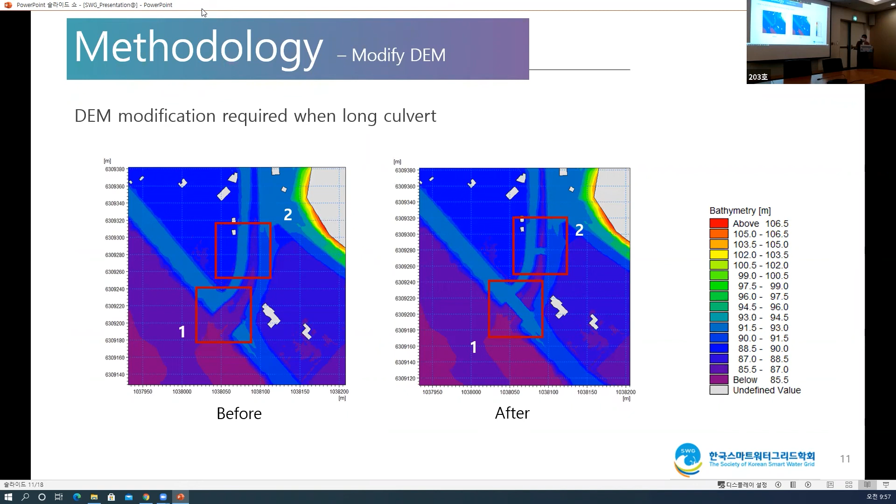Structure culvert 1 and 2 is big enough to be long culvert. The DEM of long culvert should be modified because the model setup requires the elevation of the structure.

Boundary condition was set like this. After that, simulation was run.

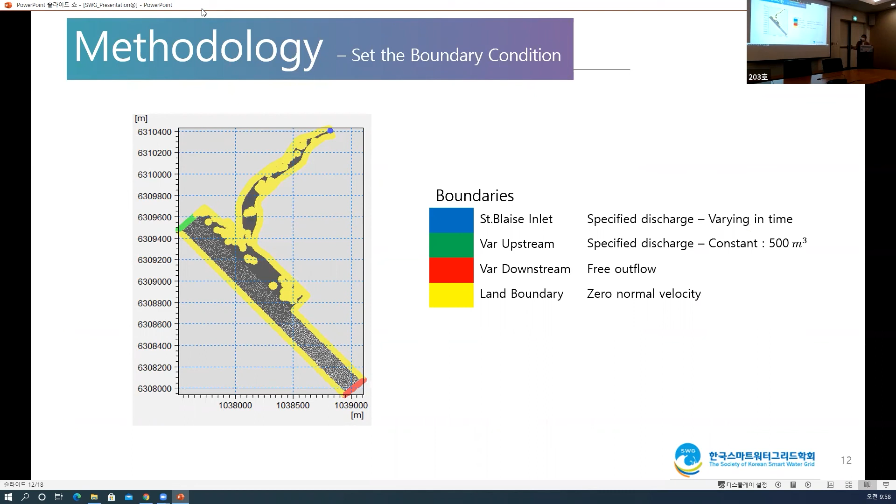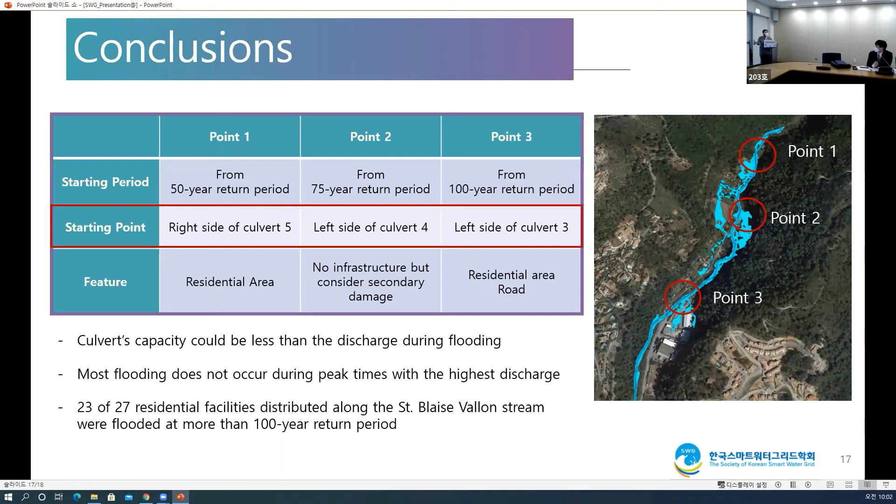Okay, it's very interesting research for a real area, engaging a small catchment, and based on your simulation results we can see some details about some flooded areas. When you consider the flood depth, where is the more critical area in your target district?

Upstream of this stream can get big damage because the left side of the stream has lots of residential facilities, so it can get big damage. The roads also, all roads were flooded, so roads can also get big damage.

Okay, and in the picture, the graphical view is very fine resolution, so I think it can apply to our real area. And if you suggest increasing the accuracy of the model for application to the real district, could you give a suggestion for the improvement of your research?

I think improving here can make it more accurate. Okay, good, thank you very much. Thank you.